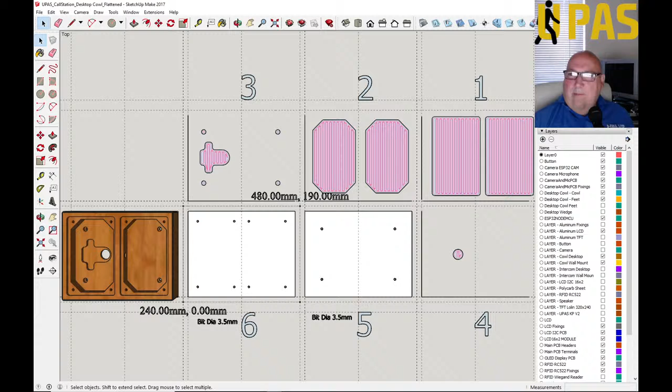So I've outputted each one as a separate CNC file, so you've got 6 files. What I've got is this online G code plotter, so I can load in each of my 6 files. This is going to be taking out the first 7mm off the model, so we can quickly play it.

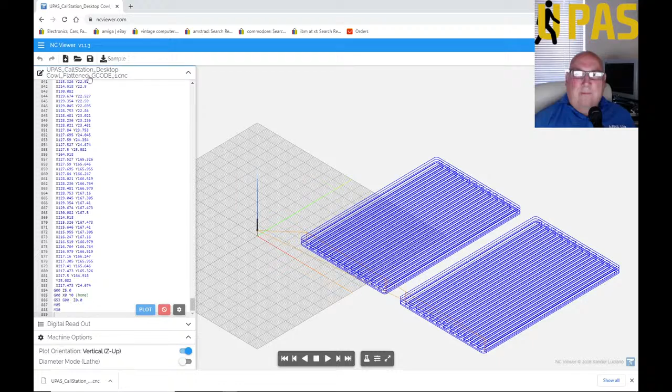This is basically the same as what your CNC machine will be doing, so you can play it out before you actually go to cut it. There is one error I'll show you in a minute - that's not my fault, it's the program, so it must be an error in the Ruby script. That's that one, let's go to the next one.

Here we are, this is the middle of the pocket that goes quite deep. I won't play it all, but you can see as it's going down in 2mm steps, so it'll mill out in 2mm steps. I've set the feed rate at half of what the default is in Mach 3, so I'm not in a rush. What I'm after is less dust, more chunks. Just have to see what that turns out like.

So today I'm just showing you through the tool path from the G code. Right, let's stop that one there, I'll go to the next one.

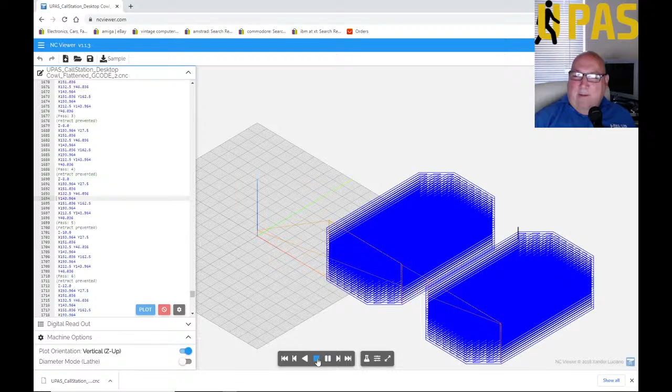Now there is one little error which I don't know if it's going to cause much of an issue or not. This is the cable entry and the cable clamp area, let's just run it while we're talking. Yeah, and also the main holes that go straight through to the bottom, so that's what your tool will do. The 5mm bit is about 30mm long before it gets to the shank, and the material is 45mm thick. But when I get to this stage, if I do it in the right order, the wooden material won't be in the way to get past the 30mm of the bit and hit the shoulder of the shank, if that's what the correct term is. Anyway, I'll stop that there, I'll keep this a short one.

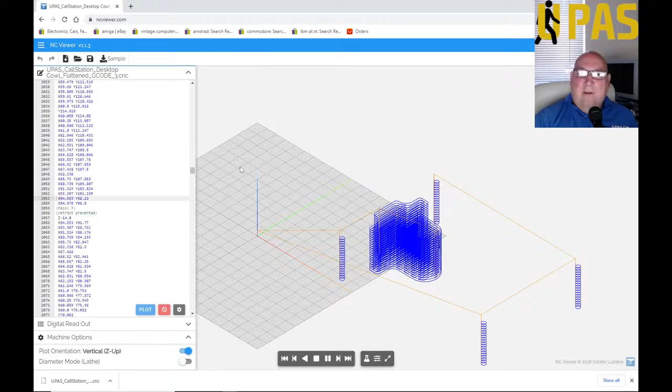So the next one is, I believe, that one. Yeah, so no, probably not that one, was it? Hang on, probably missed one. Yeah, there's the hole for the cable gland.

So basically all I'll have to cut is this end bit, but because I want to keep the safe distance, if the G code is finished, it's going to send the head all the way back to 0,0. Now if I was to set the height here just to the thickness it needs to be cut at, the head will come back and smash straight through my model. So I'm basically going to be cutting air, just fresh air, till it gets to here. It's going to take a bit of wasted time, but I'm not that bothered just for my prototypes.

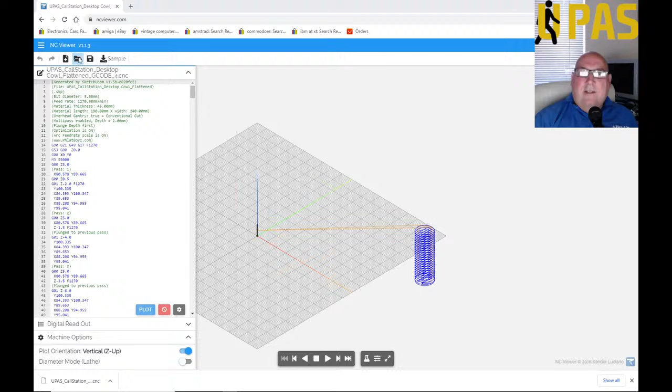Okay, let's get to the next one, it's getting a bit late this morning. Alright, so these are just the holes, basically it's just going to plunge - I'll play it again. So it basically just plunges it, but in 2mm steps, so it should be able to drill without going too fast. Okay, so that turned out okay.

Now the problem I was on about earlier is this last one. It doesn't matter how I generate it, the plunge percentage was supposed to be 100%. You can see all the rest - this was applied from the Phlatscript, the plunge tool. I've set it to 100%, but it only went to there. So the G code is incorrect, it's generating the wrong G code, but only on the first one, the rest are right.

So if I play that, you can see as it's just in reverse and then down again. So if I go to the start, this bit here is not going to drill enough, so I might have to finish that one off manually. But I should be able to edit the G code here - this first one tells you all the movements, so I should be able to copy and paste the G code, but I'll leave it for now. Anyway, so there's that, I'll leave it at that.